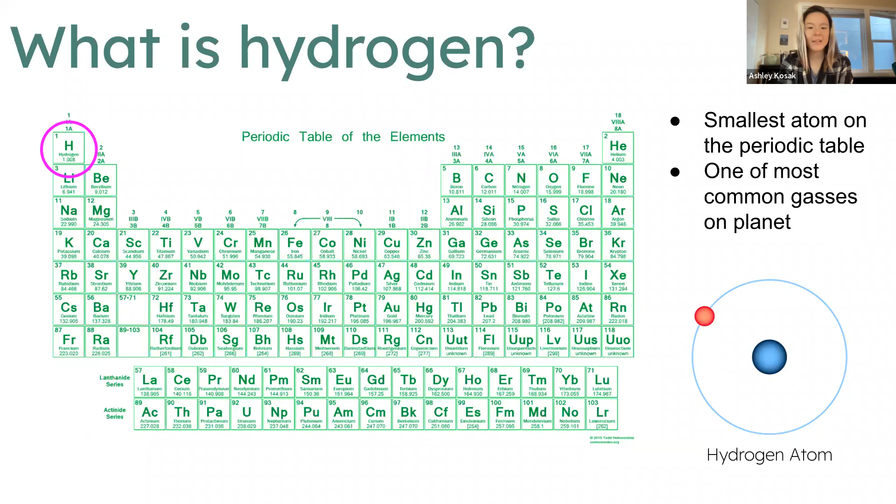So imagine a balloon, and that balloon uses helium, which is on the other side of the periodic table, similarly a very small molecule. When you put that helium into a balloon, it's eventually going to seep out through the plastic that encases that balloon. That showcases that elements with atoms this small want to escape. And so that's where some of my initial concern with hydrogen started. I was like, wait, you guys want to use hydrogen as a fuel, but it is an extremely leaky substance. So how do you plan to do that?

So there's a few different uses of hydrogen. It's been used as a rocket fuel. It can be used in welding as a shielding gas. It's used in hydrochloric acid.

And that's also been used for transportation in the past too, more notably the blimp, which honestly worked until it didn't. And so, oh well, blimps, but they tried their best.

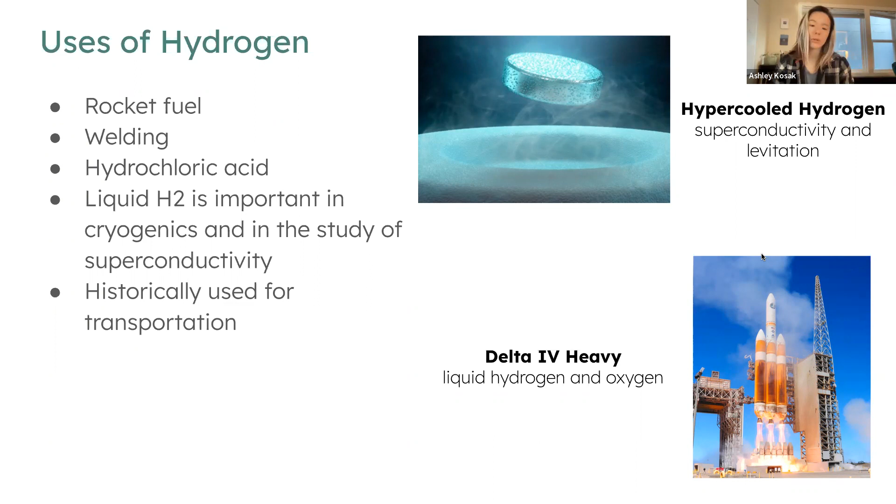And then you can see on the right, the Delta IV Heavy engine. This is one of the rockets that launched down at Cape Canaveral. And so it utilizes hydrogen as a fuel and oxygen as a gas. And that sort of fire triangle of ignition source and heat, plus hydrogen as a fuel and oxygen as the gas, allows for you to get a launch. So the space industry uses hydrogen pretty significantly too.

So let's talk about the hydrogen color wheel. Hydrogen, as you may have seen, has been getting a pretty significant amount of branding around it when it comes to blue hydrogen, green hydrogen. And I think the reason why there's all this branding around the colors of it is because it helps people understand that it's coming from a different place than where hydrogen has traditionally come from. I also think it makes it easier to avoid some of the harder questions if you can just point at a simple name for hydrogen instead of the actual use of it.

So as far as hydrogen goes, there's all these colors. Black hydrogen is coal gasification. Gray hydrogen comes from fossil fuels. Green hydrogen comes from renewable power, meaning that the power that goes into that system is coming from renewable sources. And then the molecule that they break down in order to receive that hydrogen is actually water. So you put water in, you create a steam, you get hydrogen out.

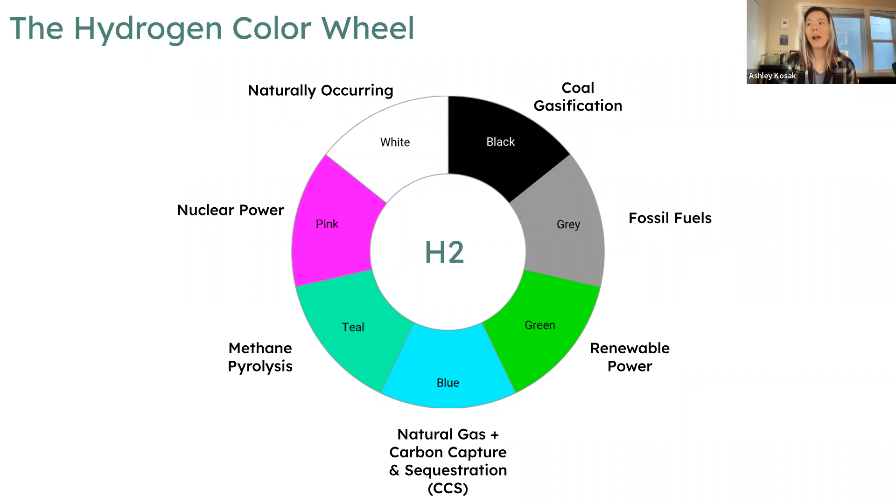There's blue hydrogen, which uses methane gas, same as gray hydrogen, those fossil fuels, but in addition to carbon capture and sequestration, which, especially as a climate network, I'm sure we all have some thoughts on, but I'm going to break that down a little bit further too. Teal is methane pyrolysis, so again, another fossil fuel source. Pink or red is nuclear power hydrogen, and then white is naturally occurring hydrogen.

Not all hydrogen is created equally, but the emissions are. So what I wanted to show here is that even though there's all this movement right now towards using blue hydrogen or green hydrogen, a majority of the hydrogen that we currently have in our existing infrastructure is coming from coal gasification and fossil fuels. No carbon sequestration. There really aren't any successful carbon sequestration demonstrations yet. And so over 90% of hydrogen is coming from non-renewable sources and carbon emitting sources.

And you can see that on the right, gray hydrogen, that's just fossil fuels, and the blue hydrogen without the flue-gas capture only has a very small decrease in the overall carbon emissions that it creates. So what we're seeing here is that even though there's industry movement towards this alternative method of creating hydrogen and making it more green, overall, it's actually still emitting a pretty significant amount of greenhouse gases, carbon. And so it makes you wonder, especially if it's emitting more methane as a result, why are we moving towards this? What are we doing here?

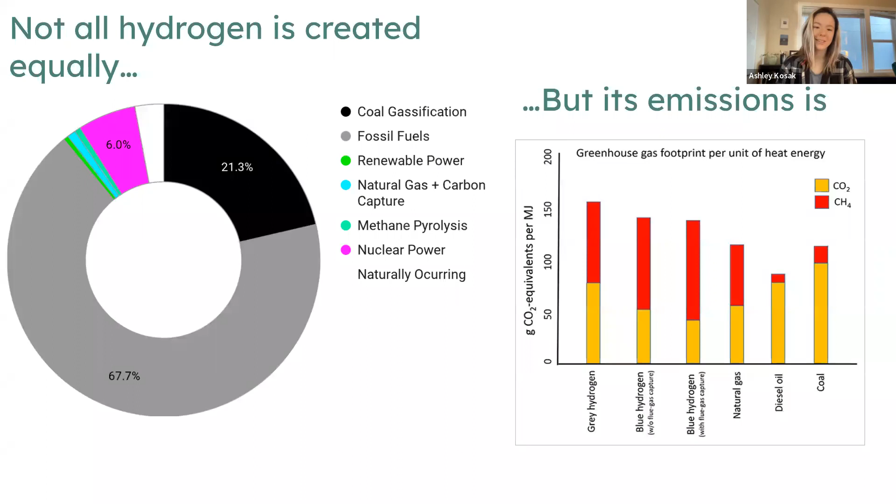So let's talk about how gray hydrogen is made. I'm going to break this down a little bit further. So my background's in propulsion, like I said, and I love a good schematic. I'm going to try to walk you through the schematic as straightforward as possible, and I've included some animations to help out too. But really what you see is you've got your inputs on the left. So you've got methane and water, a water molecule and a methane molecule. A water molecule has 2 hydrogen atoms and 1 oxygen atom, H2O. Methane is CH4, so that's 1 carbon plus 4 hydrogens.

So that CH4, that methane, is being used as a fuel to heat up this chamber to over 700 degrees Fahrenheit to perform steam reformation of hydrogen. So you put this methane in, you inject water as well, and through heating this all up, you end up with this separation of molecules that allows for you to harvest those hydrogen molecules and emit a carbon molecule as well.

I'm just going to say off the bat, this is pretty much the extent of my chemistry understanding. I took one chemistry class in college, and then they asked me to take another science elective, and I took science of the garden. So maybe the numbers of all of this aren't going to work out totally well. I'm sure that there are like 3 hydrogen molecules for every 1 carbon monoxide molecule. But just to make this simple, this is really the type of process that we're working with here.

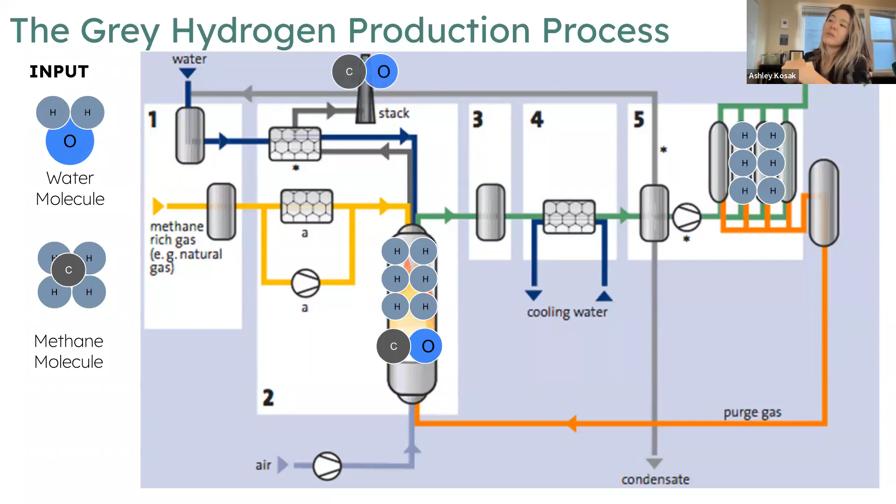So those hydrogen molecules are then going to go into the storage chamber for hydrogen, and then they can be transferred to whatever vehicle they're going to be used for. And then that carbon monoxide is actually going to go into a smokestack. So when we talk about blue hydrogen, really it's that same process, but now you've added a little carbon capture at the top.

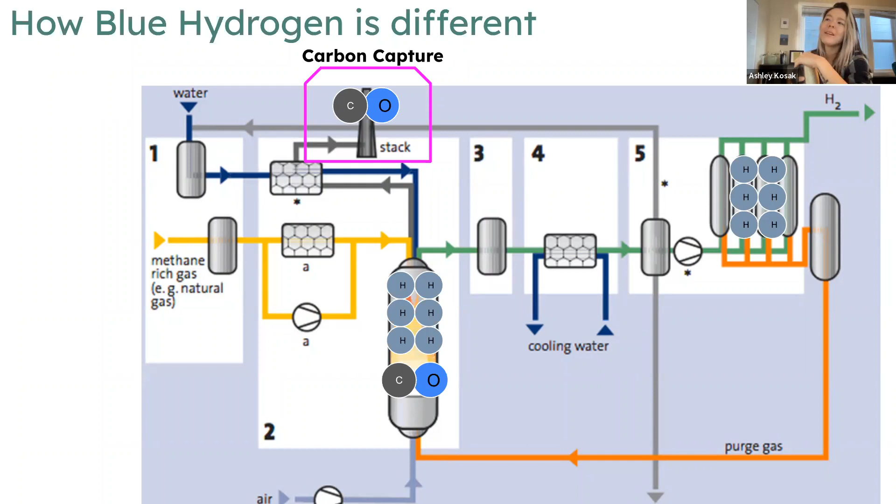And so I think this really helps break down why blue hydrogen is kind of not passing a sniff test right now, because carbon capture itself isn't necessarily a viable technology at the moment. And while there are efforts towards it, in order for this to be in any way successful, it would require that this carbon capture is 100% foolproof, and unfortunately that has not been successfully demonstrated quite yet, especially in this country.

So blue hydrogen and gray hydrogen use the same inputs and ultimately have the same outputs. The difference is that the carbon is going into carbon capture and sequestration. And now you also have to figure out where that carbon is going to go, and that could be a whole different presentation. So I'm not going to break it down too much right now, but what I want to point out is that it's really reliant on this unqualified technology, a technology that isn't necessarily scalable, and yet there's a lot of momentum towards creating this.

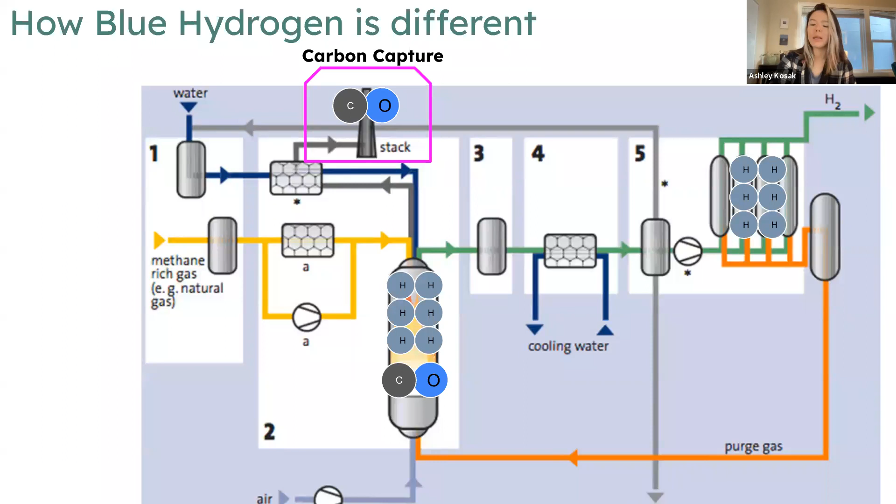So when this hydrogen is produced, it's going to go into a car. That's one of the end uses for it. I want to help you understand that too, because recently I've been seeing more Toyota Mirais on the road. I've seen one Hyundai Nexo so far, and this is part of what I think is driving this movement towards hydrogen: the automotive industry would like to not only receive more funding for development of new vehicles, but they can point towards this as their method of going green, even though this technology hasn't necessarily proven itself to be green.

So within a hydrogen fuel cell vehicle, you've got a hydrogen tank. It goes into this fuel cell, and I'm going to break that down a little further, through the process of reaping the electrons from that hydrogen. Those electrons go into the battery, and then that goes to your electric engine. So at the end of the day, what you're doing is taking that hydrogen, converting it into electricity, and then that electricity is going into an electric engine.

Oh yeah, I'm going to talk about that too. Don't worry about that.

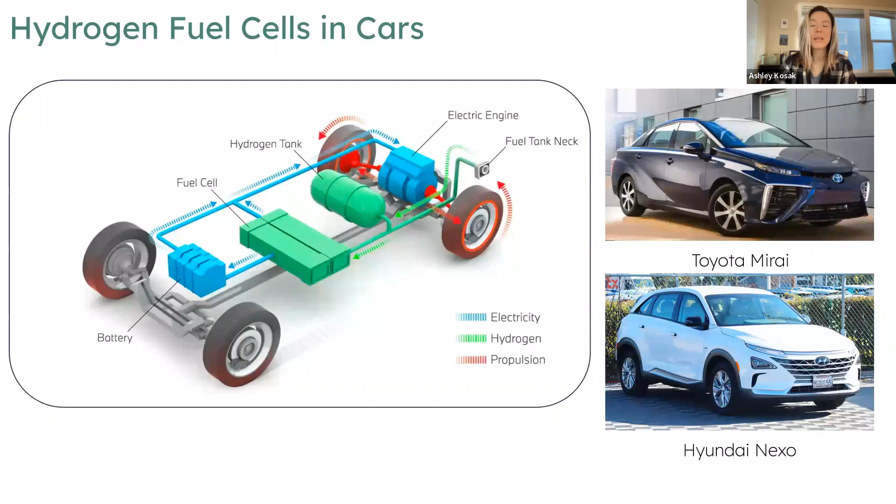And one of the criticisms I have about this is that we already have electric vehicles that are on the road right now, that are being scaled, and they have already built up quite an infrastructure for charging, whereas hydrogen doesn't have that same infrastructure, but there's still movement towards making cars that are dependent on it.

So how does a hydrogen fuel cell work? Let's do a little bit more chemistry. And I do have more animations too. So you're going to put your hydrogen in. Those hydrogen molecules have 2 electrons. This is an H2 molecule. And those electrons are going to go into your anode.

Basically, what I learned in chemistry as a little mnemonic device is the flow goes from high to low. So you go from a high voltage to a low voltage medium, and that's going to want to pull those electrons. The movement of those electrons is what creates electricity. So electrons are going to be pulled away from the hydrogen atom. Those electrons are going to travel through what ends up being that battery that you saw in the previous slide.

And then those electrons end up in the cathode, which then can help bond hydrogen. So hydrogen, being such a small gas, is going to seep through that electrode. This is oftentimes platinum. This is usually a rare earth metal that wants to hold onto hydrogen.

And putting in oxygen as an air intake is actually going to cause a chemical reaction which emits water, H2O. And so that's why in hydrogen fuel cell vehicle commercials, they're saying that the output is water. It's such a clean burning thing. You don't have a carbon output because the only output from this process is water.

But what they're not pointing out is all of the emissions leading up to that point that came from that smokestack, all of the emissions that came from creating the fuel that goes into the process of creating hydrogen. You end up with a more inefficient process.

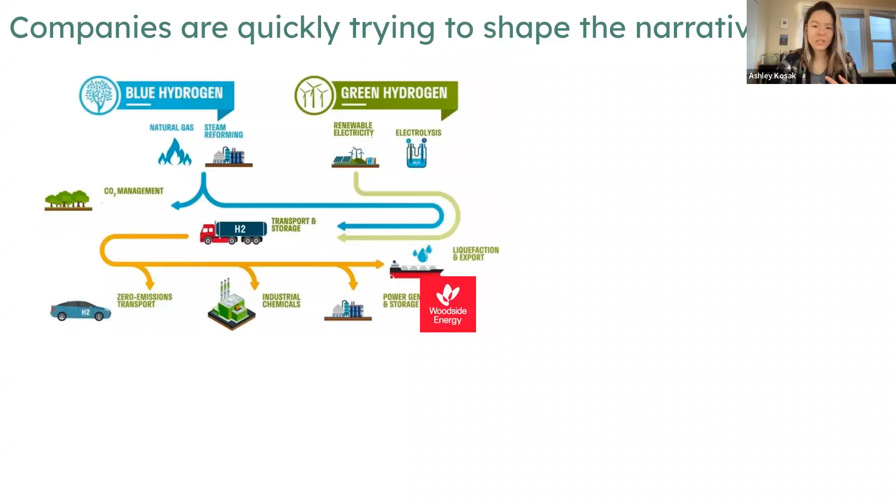So I think a lot of the energy companies out there are trying to make this seem as simple a process as possible so that people don't have to look at how the sausage actually gets made when it comes to hydrogen.

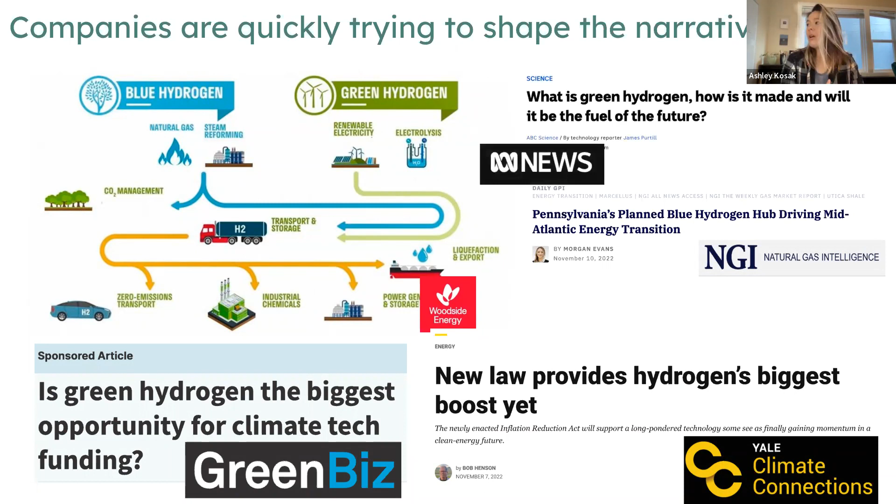GreenBiz said, is green hydrogen the biggest opportunity for climate tech funding? New law provides hydrogen's biggest boost yet, from Yale Climate Connections. Natural Gas Intelligence says that Pennsylvania's planned blue hydrogen hub will drive the mid-Atlantic energy transition. And ABC News said, what is green hydrogen? How is it made? And will it be the fuel of the future? And a lot of this publication is being driven by marketing agencies that are working with oil and gas.

So I just want to point out, the reason why I point this out is because the narrative around this is shaping what the venture capital world looks like. This is shaping how investments are going. So I've been working within the startup space now for about a year, and hydrogen companies are on the rise. Hydrogen startups are emerging left and right, and they are getting millions and millions of dollars of funding.

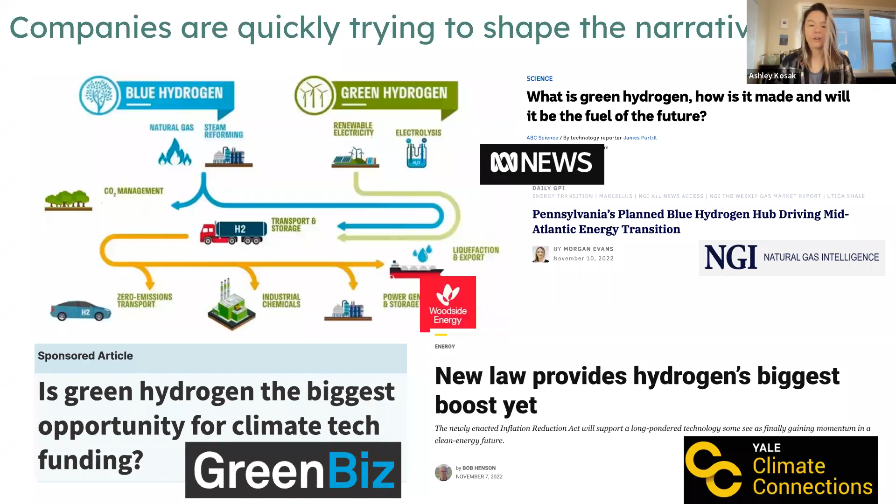Sorry, I'm going to skip that slide. I'm going to go back to it.

They're getting millions of dollars of funding, and the US government is also putting a lot of funding towards this as well. So as far as policy goes, the IRA is providing $3 per kilogram of carbon captured for specifically this technology. There's $8 billion in funding for new hydrogen hubs through the infrastructure bill. There's $3 billion in funding for ultra-efficient vehicles, which are the vehicles that I showed you. And that also includes $55.1 billion in loans for companies to build new facilities for this. On top of that, $5 billion are being allocated towards replacing the existing energy infrastructure.

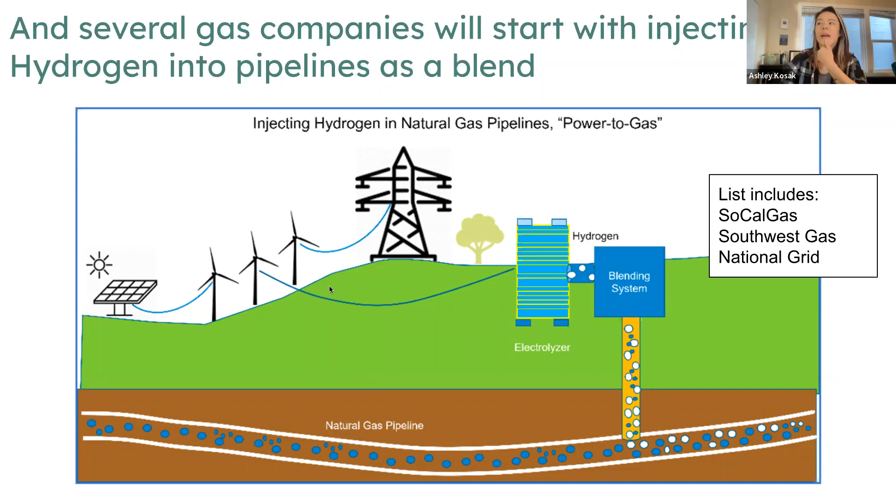As far as energy infrastructure goes, part of the plans that SoCalGas and Southwest Gas and National Grid have is to take this hydrogen that they claim is going to come from green hydrogen, but through the transition, it's going to start with blue hydrogen. They're going to inject that into the natural gas pipeline. And after you inject more than 5% of hydrogen into your natural gas pipeline, you end up with more embrittlement, which is something I think someone said in the comments of the chat. So thank you for pointing that out. So I think that hydrogen is sort of a way that the industry is trying to show that they're transitioning without actually doing much transition.

So when green and blue hydrogen are compared with renewable energy itself, let's just look at solar and wind, take the energy from that and use it for electric powered vehicles, electric powered infrastructure. When you evaluate these against that existing infrastructure, it is actually creating much more emissions than it saves. It makes a lot more sense for you to take those renewable energy sources like solar and wind and put them directly towards an electrical purpose versus using them to create a different form of energy that then goes into creating electricity. Logically, I can't make that work in my head.

And it's sort of the same thing even with methane. It would be less carbon intensive for you to just have methane and use that methane as a gas versus have methane, put it through this process, superheat a tank to 700 degrees, and then create a hydrogen, which then has to go into a truck that's going to get trucked to where the vehicles are. Those vehicles are going to fuel up, and now they're going to create electricity for that vehicle. I'm trying to explain that. Just use the thing that you started with. Why create all these derivations instead of just using these fuel sources or electricity sources as they were?

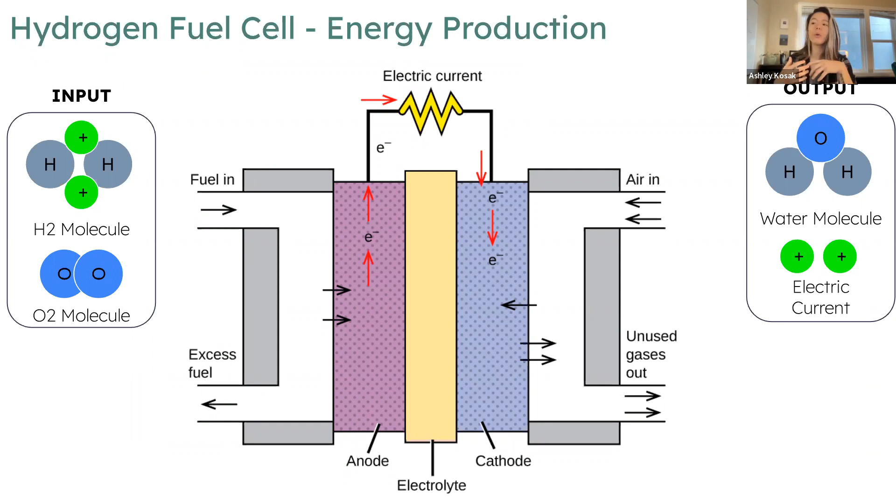Oh my gosh, this is what happens. So when we're looking at a pipeline, what they're talking about for embrittlement is that after some time of being exposed to these properties that are wearing down the metallurgical characteristics of whatever medium they use, eventually it's going to start creating leak paths. And even a tiny leak path will allow hydrogen to get through because it's such a small molecule.

So I think that's some of the risk with this. Methane, being a CH4 molecule, is a significantly bigger molecule. There's still opportunity for methane leakage within these pipelines, but because hydrogen is able to seep through more easily, it creates more opportunity for leakage through that metal.

Got you, and that's super helpful. Then I had a part B to that, and it goes back to hydrogen hubs. Through these processes, is there an understanding of the localized harms where these hydrogen hubs will be located? Is there more exposure to spillage, or any study on that? I'm sure there is. I just personally don't know.

I was at a conference with Last Chance Alliance the last couple of days, and they showed an example of what happens when a carbon capture pipeline has a small rupture. Even with a small rupture, it releases this super compressed, super liquid carbon out into the atmosphere, and then it just falls onto the immediate surroundings and the land around it. Understanding the impacts of that, I think, is crucial, but I only had so many slides, so that's going to be the next presentation, but thank you.